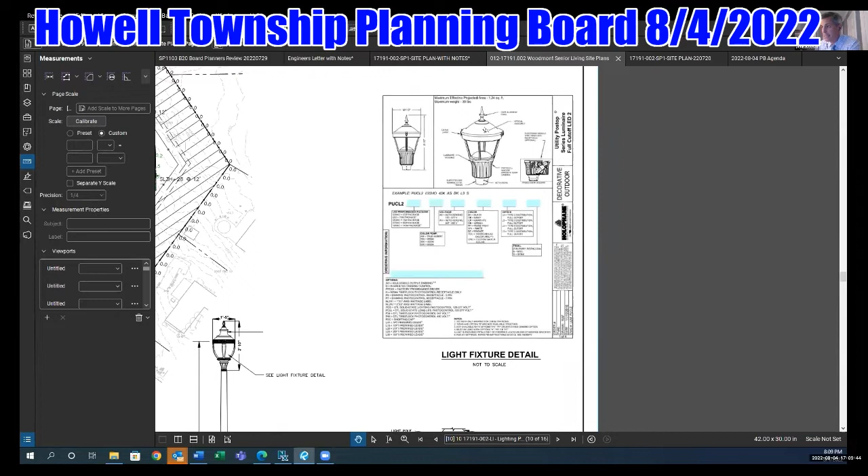And what kind of shading is part of the light so that they're not directing the light into bedrooms? So what I'll do here is I'll share my screen again. So if you can see this is the lighting plan that we submitted as part of the package. This shows the light fixture, that's a 12-foot tall light fixture, and you can see this is a nice decorative light fixture. You might look at that and think, okay, there's going to be a light element here that's going to project out, but these are the new style LED light fixtures. So they actually provide a light up in the top, so it projects downward. It's a cutoff light fixture, so the light is actually up above and projecting downward rather than projecting out. That'll significantly improve the amount of light spread. So that's why when we look at this lighting plan, we see there's 0-foot candles along your property line.

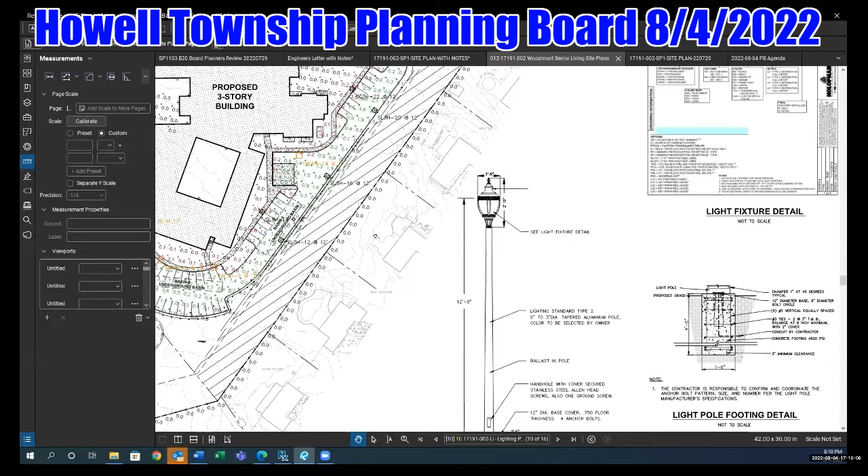There's been a number of traffic study comments. How do these projections change when the Wendy's opens up right next door? That'll have to defer to our traffic expert.

Yes, I believe you're talking about the Wendy's on Route 9. No, the Wendy's on West Farms Road. That's going to be adjacent to the project. Adjacent on West Farms towards Route 9. That's my understanding, that there's a Wendy's that's been approved next to the gas station, between the gas station and the entrance to your project. Is that not correct?

I'm not sure to my knowledge if it's been approved by the board. No approval as far as I know. I think there was an application, but I think it's between this entrance and the White Castle, further down Route 9. It's further south. Okay, that's not what I was informed, but if you're telling me it's on Route 9 and not on West Farms Road, correct. That old house, I think the only thing left is the foundation, which is just south of this entrance, correct.

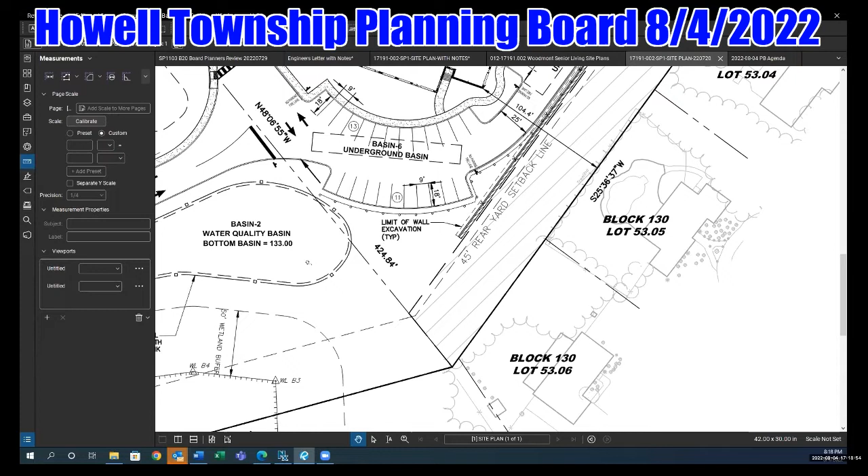Okay, and if you would just leave that up for one moment. So in the first June meeting, there was a comment that the 50-foot buffer would be adequate because there was no parking facing into the residential neighborhood, but there is parking that will be facing into my property. I would like to be assured, because it almost looks like on the landscape that a lot of it drops off as you get down towards the bottom. Yes, that it drops off down here. So I'm certain we would be agreeable to add additional landscaping here to ensure year-round screening against all that parking.

Okay, and then this is just a question for the engineering professionals. We talked about the displacement with the wall and the regrading that might occur, and if I understood correctly that's not going to happen because you've made some changes to the plan. But if you start from the eastern portion of the property, there's a hill on West Farms, and there's the hill that Fox Hill Drive comes up as the highest point, so I'm at the bottom of that hill. My obvious concern is how much water is going to run down towards my property and what will be done to contain it, to make sure it makes it to the basin and not my backyard.

Okay, well I'll explain what's going on with the grading and drainage in this area, specifically along your buffer. All of the stormwater that comes off the building and off these roads is captured within the inlet system. The roof runoff is taken to underground detention basins. The surface runoff from the roads is taken to this water quality basin down here, then discharges into the water quantity basin, and ends up at this end of the site in a low-lying area, which I believe is lower than your property. So all this runoff is captured, curbed, and directed away from your property.

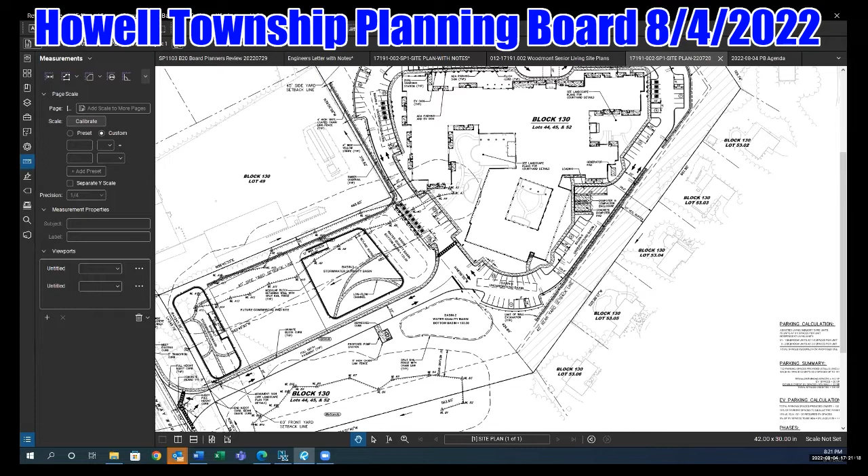Laik Green. Mr. Green, I just need to swear you in first. Do you swear or affirm the testimony you're about to give this board is the truth, the whole truth, nothing but the truth? Absolutely, yes. Okay, go ahead. Give us your name and address. Lake Green, L-A-I-K-G-R-E-E-N. My address is 8 Fox Hill Drive.

I don't have much to say, I'll just make it brief. Pretty much everybody here who spoke tonight claims there's no adverse effects from this development. I'll tell you right now, the quality of life, not only for the people who live on West Farms Road, but also people who live in this development, specifically us who are right on the border of this proposed site, will be diminished greatly for subsequent generations. I don't even see a justifiable need for a site like this when you have Brandywine Assisted Living just 5 minutes down the road, less than a mile away, that's already there. And as far as I'm concerned, it isn't even at full capacity. I just say to the people on the board, your public servants, please act in the interest of your community. That's it.

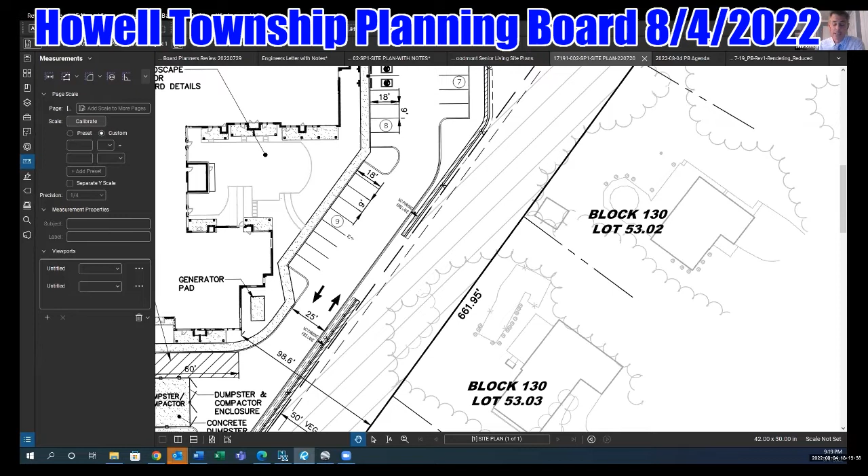Now if I was to go to Sunnyside Road, there's Lukoil, and there are houses behind that. They put up a 10-foot berm with a 10-foot fence with 20-foot trees that keep going. On one side you can't see the house, and if you went to the house side you can't see Lukoil. I'm looking - how come we can't have that?

If this township approved that, they should approve this. We stated and the experts have testified to it - I don't care what the experts stated, I'm going to be looking at a 50-foot building. I would have stayed up north 40 years ago, I moved down here for the country, you're turning it into the city. Another thing, when did West Farms Road become a commercial property, or highway commercial?

The questioning about the sufficiency of the buffer is certainly relevant and important, something we have discussed. The chronology of how the current zoning came to be is not within the board's jurisdiction - it's not an issue the board is permitted to consider. It's just whether the zoning as it exists now, whether the application is compliant. But your questions, Mr. Gimbarski, about the buffer and its adequacy are certainly within the board's jurisdiction, and questions the applicant should be able to answer. So how do we get past this apparent objection? You don't get past it - you listen to it, the applicant responds to it, and the board can consider it in its deliberation.

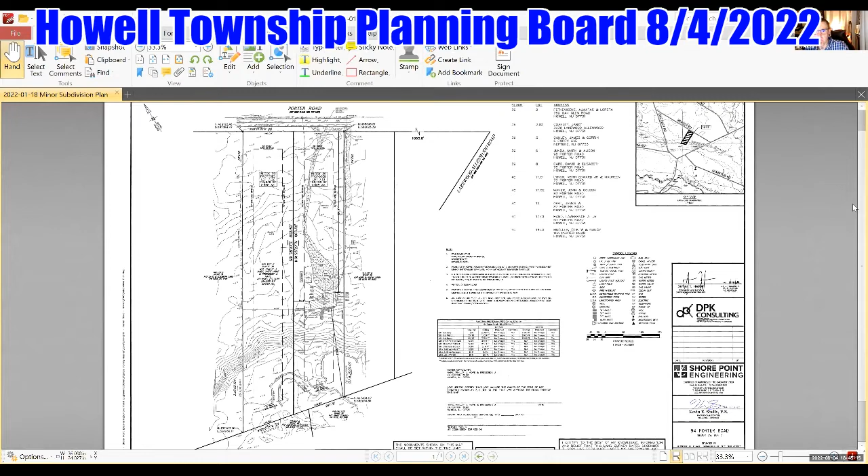Okay, Todd, do you have anybody else or is that it? Sorry, I got lost. No, that completes our testimony. All right, any of the board members have any questions? Board professionals, anything? I have nothing, Mr. Chairman. I'm good, Mr. Chair. All right, seeing none.

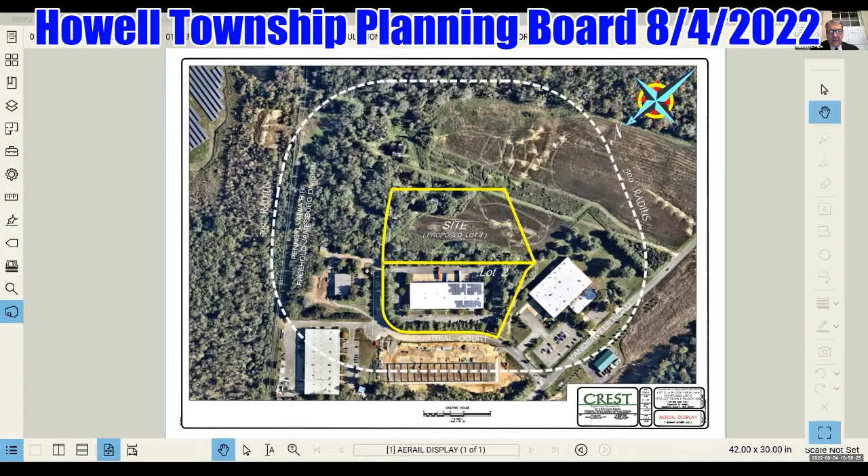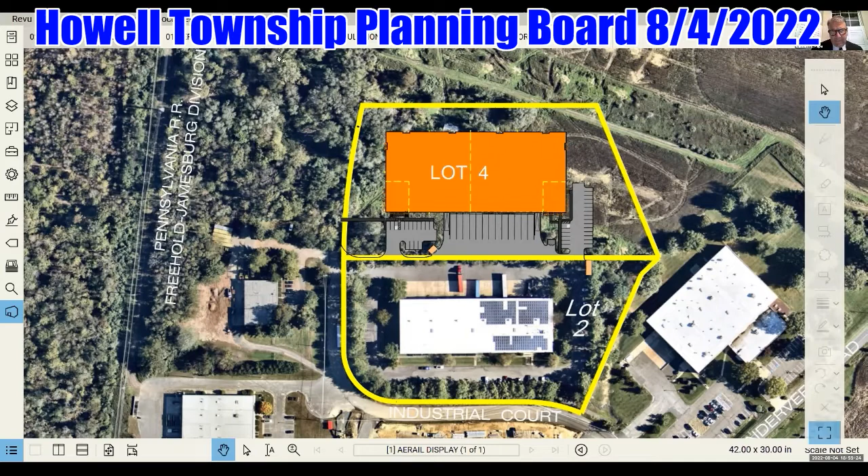And Mr. Strong, if you would bring up your colored site plan, please. I'm not going to ask that you testify here. I'm going to use the last couple of minutes in the following manner: this is the middle of the industrial park. The reason we were on your agenda three times before beginning this public hearing is that each time we received a staff report, we met with your staff and modified this plan substantially. I think it's quite clear this plan is very well landscaped, that the circulation is very efficient and smooth, and we worked with your professionals to get all the encroachments, all the violations, out of the buffer. A lot of work went into that. You know that, Mr. Strong, and I take this responsibility seriously.

We have been to the fire marshal on at least 2 occasions. Back in the winter, we were at the Environmental Commission, and Ms. Spiro and I actually walked the entire site to make certain that we had a full understanding of it. I tell you this on purpose: your applicant went to great pains to make certain that what we're about to present to you is a project worthy of being approved.

I think that is the best use of the 10 minutes we could take, Mr. Chair. With your permission, we'll return on the 18th, go through the details of this plan, and go through your staff's reports. Is that acceptable procedure?

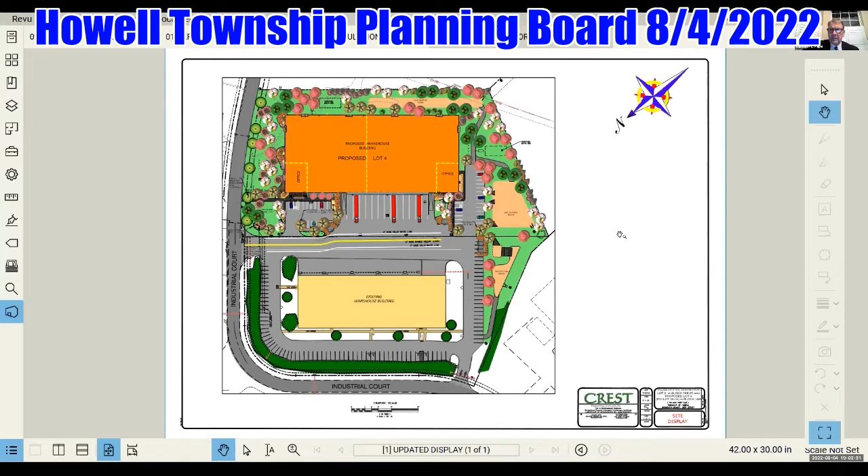I believe we have to go into executive session. We do, Eileen, if you have the resolution. But in this instance, we will be reconvening in public. And I have to recuse myself from this again.

Good night, Nick. Night, Nick.